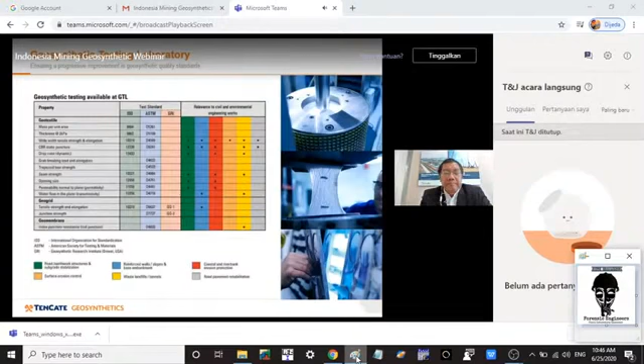The next slide shows the certificate from GTL as a geosynthetic testing laboratory, and also the certificate from the Department of Standards Malaysia. In Indonesia, our offices are split over three parts of Indonesia, from west to east, to cover all territory. In the west, we have a branch office in Pekanbaru, mainly to support Sumatra and western Indonesia. The center is covered from Jakarta, our main office in Indonesia. In the east, we have a branch office in Makassar.

So basically in Indonesia, we are able to support product technical sales, and we are also able to support design engineering. Mr. Hadi is our design engineer in Indonesia, now the host. For commercial matters, we collaborate with selected partners and distributors.

Okay, now we are going to the brands of TenCate and details of the products. The first brand is TenCate Polyfelt. This is a very popular brand, especially in Indonesia, the Asia market, and Europe, because this brand originally came from Austria. It encompasses a wide range of non-woven and composites combined with non-woven elements for various infrastructure markets. In Asia, we produce TenCate Polyfelt non-woven and composites in our production facility in Malaysia.

If you look at the detail for embankment and slope - high embankments under heavy load from mine infrastructure, and low embankments over soft soil, are very common mining challenges. As you can see from the picture, the geosynthetic is placed at the bottom of the embankment, functioning as basal reinforcement. Mirafi PET is a very good material for this application, and our product can now meet up to 2000 kilonewtons.

The next application is for slopes. Reinforced soil slopes create access roads or working platforms, and can utilize site-won materials as both fill and backfill material. As you can see from the picture, the geosynthetic is placed layer by layer as slope reinforcement. Our products for this application are geogrid and also PEC composite, good for fine backfill material, as well as Mirafi PET which has a range up to very high tensile strength. For erosion control, we use, among others, Polymat geomat.

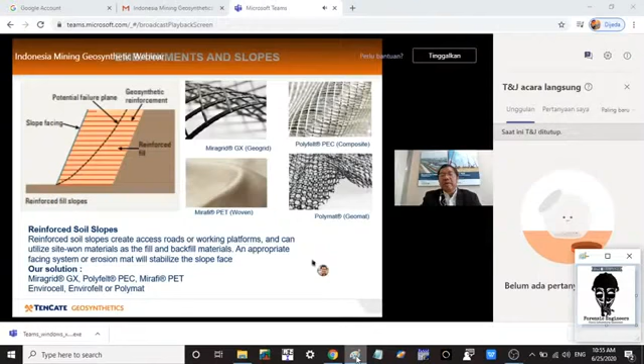The next application is for dam walls and retaining structures. This is a very common application in mining. Our products that meet this application are geogrid and also the polyfelt PEC composite.

Now we move to the next application, haul roads. This is a main application because mining sites have long roads for hauling. The function of this geosynthetic has the following benefits: cost saving and lower environmental impact; separation, so there's no mixing between the granular road construction material and the subgrade; and improving a stronger platform over time due to the reinforcement.

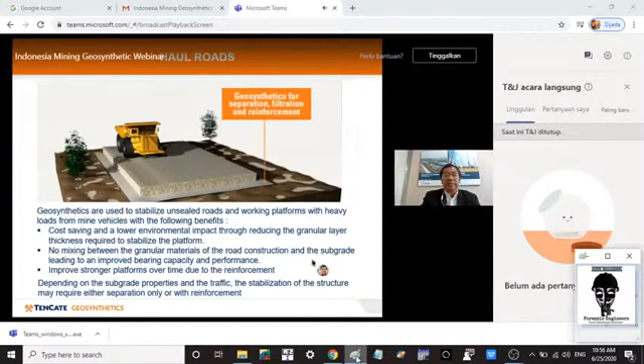The choice depends on the subgrade condition and the traffic load. The lightest option is to use only separation, for which we have the product Polyfelt TS. Its function is as a separator to prevent the upper granular layer from penetrating the subgrade beneath.

As you can see in the picture, by using the geosynthetic we can reduce the fill layer embankment thickness. This results in cost savings when we use the Polyfelt TS non-woven.

If the ground is very soft and the traffic is very high or heavy, separation alone is not enough, and we need another geosynthetic that can function as both separation and reinforcement. You can see the comparison between using no geosynthetic, using separator only, using geogrid, and using the new product developed by Tencate under the brand Mirafi SP geotextile.

As you can see, with Mirafi SP the embankment can be minimized. This provides cost savings for miners and is a very good material.

I'll show the comparison on the four main functions of this product, the Mirafi SP, starting with its reinforcement performance. We can see from the picture the comparison between SP and geogrid.

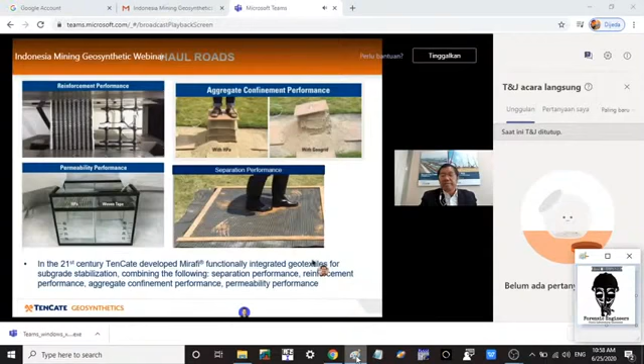Next is the port application, for hydraulic applications, where we have products under the Mirafi FM series. The port is a very main part of the mining supply chain, used to deliver material from the mine to other areas.

As you can see in the picture, the Mirafi FM concrete matrix can be used as basal reinforcement, the Polyfelt PS is used for filtration under riprap, and Geotube can be used for a core or breakwater, and also for dunes.

For railway, even though we rarely encounter this, the next infrastructure for mining, railway, should be a very main part of delivering mine product to the port.

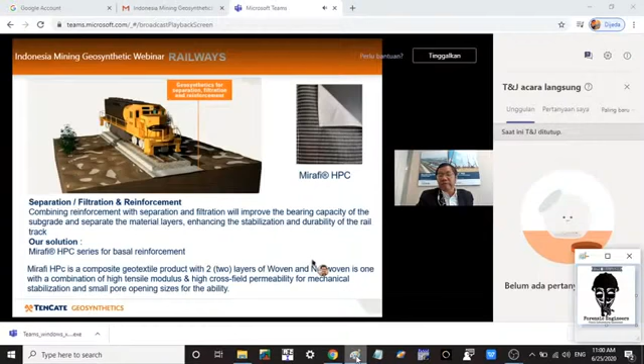The product we have is Mirafi HPC, a composite geotextile product with two layers of woven and non-woven material, combining high tensile modulus and high cross-field permeability for mechanical stabilization, with small pore opening size for filtration ability. For more product details, interested participants can contact our office.

This is specialized for railway applications. The next one is lining and water management, which I will pass on, as the next presenter will explain tailing and water management.

Included applications are using GCL for the lining of ponds, and also non-woven material as protection against the lining system, such as for geomembrane.

The next presenter will talk in detail about tailing and water management using geotube dewatering, and also mine processing. Please keep following this webinar, as the next presenter will cover these three applications, including closure and rehabilitation. I will pass this one along.

Finally, I'm going to the last part of the presentation. I'll show some selected project references, especially in Indonesia, from work already completed. The first is the application of non-woven composite reinforcement for separation on mine roads. As I mentioned earlier, the haul road is a very good application for this material.

This project is for coal mining in South Kalimantan, already about 10 years ago. Then the next project...

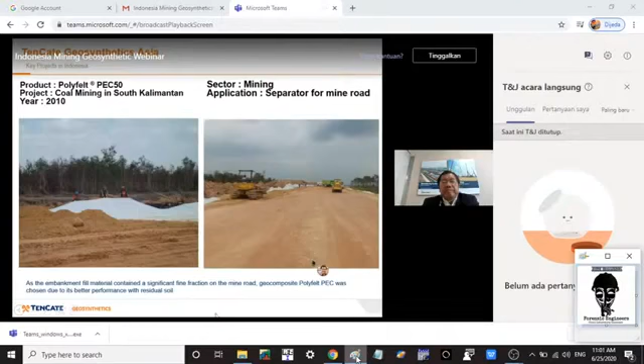The next one is the application of steel PET woven material, used for... Okay sorry, one slide before that: application of geogrid GX200/50. This is for a reinforced structure in a gold mine in East Indonesia.

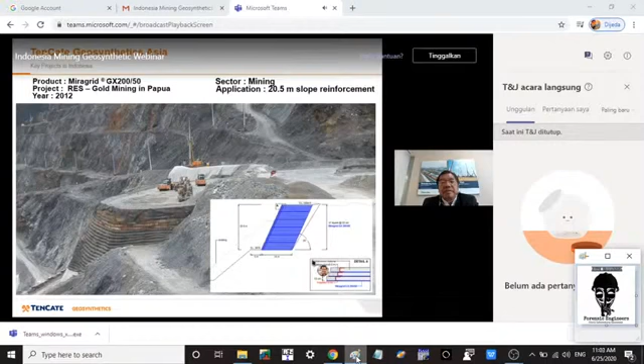As you can see here, the slope height is 20.5 meters, and the geogrid was installed layer by layer.

To show you the rough drawing, it's installed layer by layer using PET 200. I'd like to inform all participants that TenCate provides technical support. We can give a proposal that includes the detail of how the material will be installed during execution.

Another interesting application is for a dump site for coal gradation, mechanical screening at PT KPC in East Kalimantan. This was a long time ago, but it's a very good application of PEC because the fill material contained a significant fine fraction, so PEC as reinforcement was chosen due to its better performance with residual soil. So PEC is a very good product for fill embankments with fine residual soil.

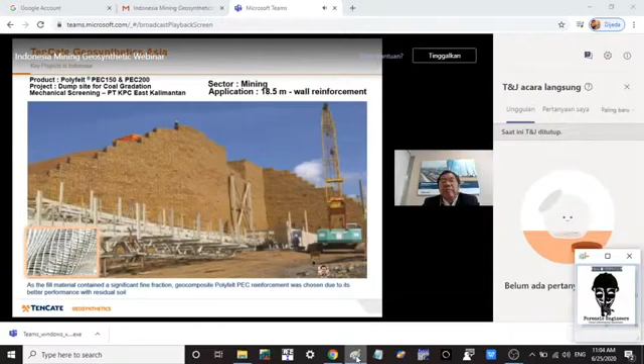This application is for a wall, with height up to 18.5 meters. You can see the drawing, two types of PEC installed: on the bottom, PEC 200, meaning 200 kilonewton, and at the top of the wall, we use PEC 150 kilonewton.

The next one is still slope reinforcement, for the dump side for slag at PT Inco Nickel Sulawesi. This was already more than 10 years ago. We can see here that PEC 100 and PEC 150 were installed layer by layer, showing how the installation was done on site.

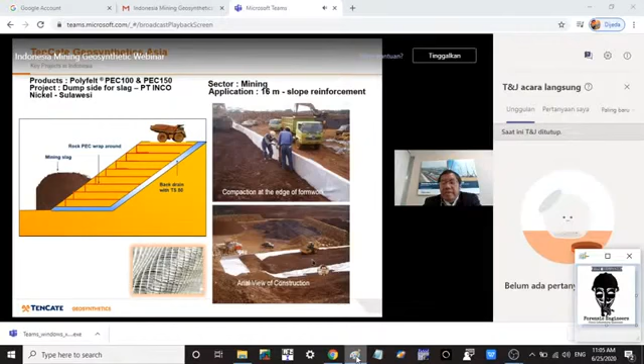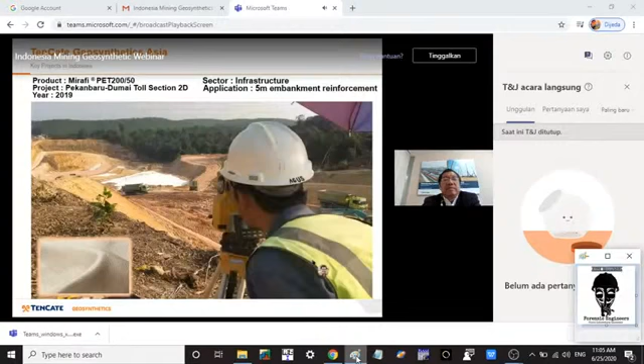Now to share the application of prefabricated vertical drain, this is for infrastructure for the Trans Sumatra project. The Sumatra highway is now under intensive work to be finished this year or next year for some sections. So we installed PVD, and also PET for embankment reinforcement.

The last application in Indonesia is for lining. We use a geosynthetic liner, made from natrium or sodium bentonite, to be the impermeable liner for lining applications.

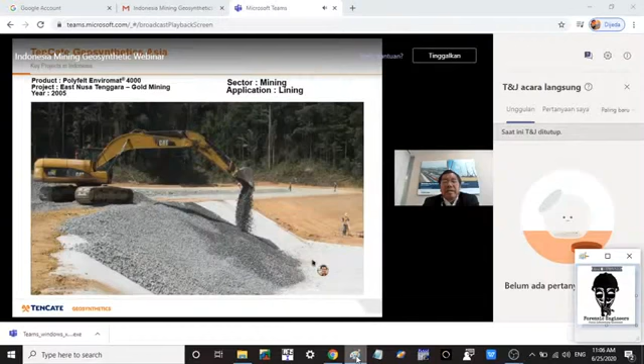The last project, the geotube geodewatering project in South Kalimantan, I'll pass on since the next presenter will talk more in detail about this.

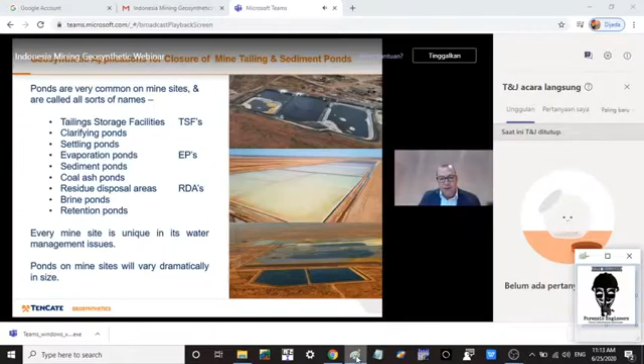So if we look at a water or liquid containment pond on a mine site, geosynthetics can be used in 3 different applications. The first is when you're actually building the pond. You may use geosynthetics if you're lining it, so things like geomembranes or GCLs, as well as other materials. And then when the pond is in use, you may want to be dewatering it, removing the sediment or sludge from the water. So you can use geotube dewatering, and occasionally, if you're more towards the end of life, you might be looking to dewater it using PVDs perhaps.

And at the end of the useful life of the pond, you may wish to come back and cap it, and that's where we'll be talking today. And there's two solutions that are used in capping of a pond. You can either cap it with a lining solution, such as a geomembrane or GCL, and that's pretty much done to make sure the rainwater coming in does not get into the sludge underneath, or alternatively you don't let the contaminants below come up. Or you may be looking to reinforce the top of the pond, which will be the focus of what we talk about today. And essentially what you're doing there is putting soil on top of a very, very soft sludge.

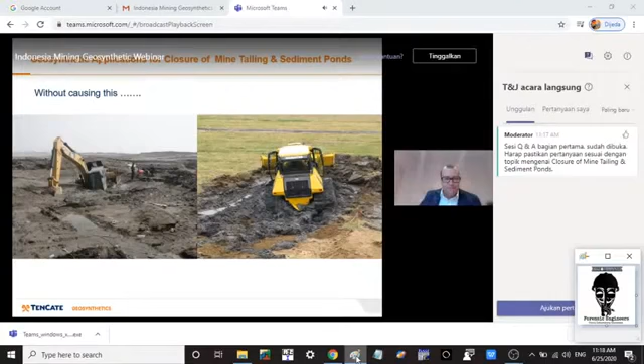So they could have just filled that up with sediment and then built on top, they could have dewatered it out, or they could have capped it. But at the end, their intent was to get a layer of soil on top so they can revegetate it. So that's the situation we're talking about.

So if we've got a pond with very soft sludge, we need to be able to get construction access out there to place the reinforcement solution as well as place the soil layer. That's why the reinforcement layer is there. It needs to separate the sludge below from the material on top. It needs to allow water flow, and it needs to have good tensile strength. And the strength of the material we'll select during the design phase.

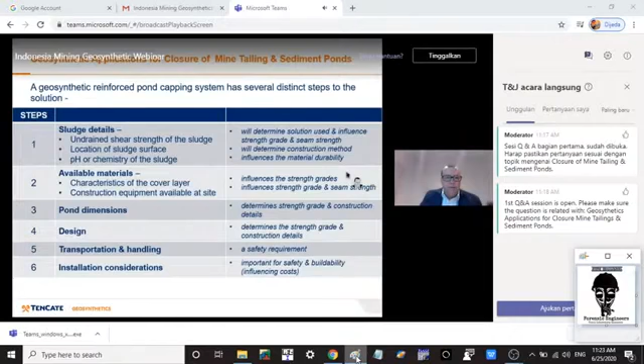So if we start with looking at the sludge, you can look at the pond and you can try and determine if your crust is stiff or soft, but the best way to do it, or the only way really to do it, is to actually determine the undrained shear strength. It's one thing to look at it, it's another thing to know what's going on beneath the surface, as well as how consistent the undrained shear strength is across the pond as well.

So if the actual geotech report comes back and says you've got some reasonably good strength for that crust as well as beneath it, then the simplest and cheapest method is just to build on top of it. Option 2 is where it's kind of middle of the range, and you may have solutions where you can stiffen it a little bit. So you may dewater the sludge, or alternatively, if you're confident, you may want to have the geotech people look at placing thin layers of dry tailings and building it up. But you'd want to know for sure what's going on beneath the surface.

But there are many instances where that sludge is actually either soft on the surface or soft beneath the surface, and you need to reinforce it. And that may be in instances where you've actually filled that pond quickly and it hasn't allowed the material below to evaporate out. It might be in high rainfall areas, or it might just be the poor consolidation properties of the sludge itself. But option 3 is where we're looking today.

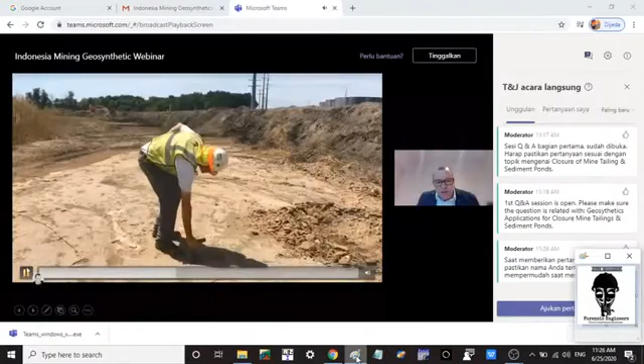You can see as he punches through the crust how soft it is underneath, and with hindsight perhaps he should have been wearing a safety harness or similar. But you can see the point there that whilst that crust looks stiff, in actual fact underneath it's pretty weak.

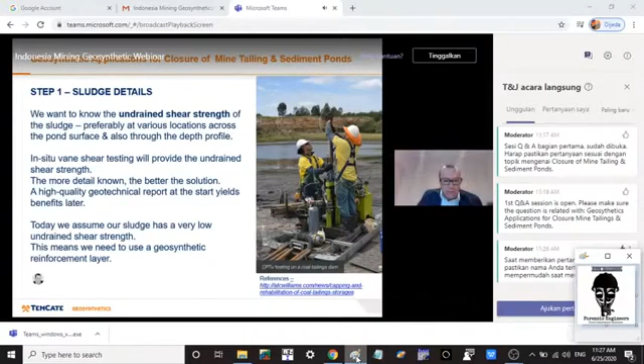I think it's all well and good to have one result, but you'd want to know across the width and down the depth at a number of locations exactly what we're dealing with, because that'll yield what we're building on. So today we'll just assume we've got a very low undrained shear strength, therefore we need to use a reinforcement layer.

Another detail we should determine with the sludge is the pH, and this is more just a check for short-term durability. So with a mining pond closure, you might be dealing with environmental regulations that'll start talking in hundreds or thousands of years, but the geosynthetic reinforcement is not required for that long.

So the geosynthetic reinforcement is there for the initial years in terms of durability, and is there mainly to take up the load during the construction phase, because over the longer term, the actual cover layer will help put downward pressure and push the water out of the sludge below, and it'll stiffen it up a little bit.

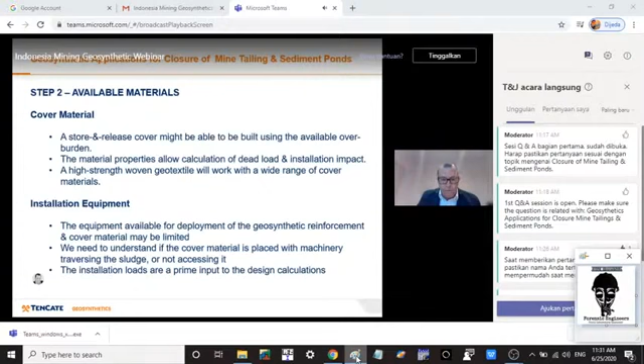So for the point of today, let's just assume that we have a 300 mil drainage layer, and then we put a 1 metre thick capping on top, and we're making that capping layer from the available overburden or mine waste, and we know what construction machinery we've got as well. So this will give us the inputs into the design phase.

Next, we've got to understand the pond dimensions and how they relate to the geotextile panel sizes, a little bit in the buildability phase. So we'll assume a pond of 100 metres by 300. It's not very big. Some dams, as I said before, can be 200,000 or 300,000 square metres or bigger.

We can supply high strength woven geotextile reinforcement in panels from the factory. The benefit of this is the seam strengths achieved in factory made panels are higher than on site, and seam strengths may play an important role later on, which we'll talk about during the construction phase.

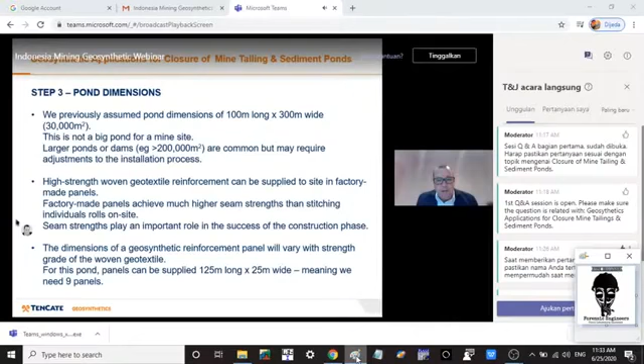So for this pond, we are able to make rolls of 125 metres length, so longer than the 100 metre length, and panels of 25 metres wide. So that's 5 rolls stitched together. So in this case here, we would need 9 panels. Now the 9th panel may not be 25 metres wide, but you can see the logic: take the pond dimensions and start to figure out how many panels you need.

So now we step into design. We've got our knowledge around the sludge. We've got our knowledge around the loads, as in the machinery loads and the construction and the cover material loads, and we understand the dimensions of the pond and the panel layout.

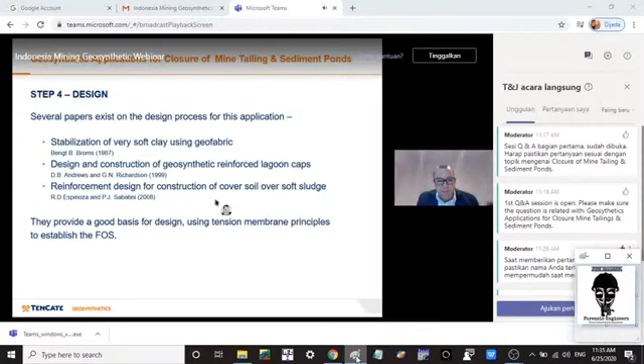So in terms of design, I'm not going to step through it. What I will point out is there's 3 very good papers. They all build on each other, from 87, 99, 2008, and the 2008 paper actually gives a worked example as well. These papers provide a good basis for design, and they can also support your own design methods with your own software, or proprietary software.

Now, if the sludge is very weak, as the cover material is placed, you're going to get stresses along the seams. So the seam strength needs to be understood. I mentioned before that factory seam strengths can get a higher result than in situ seaming. This is where you need to apply judgment. For example, with in situ seaming, you can do trials, and you might be getting 30, 35%, maybe 40% of the strength across the seam, depending on the capability of the stitcher. In the factory, depending on the capability of the teams, you can get north of 50%.

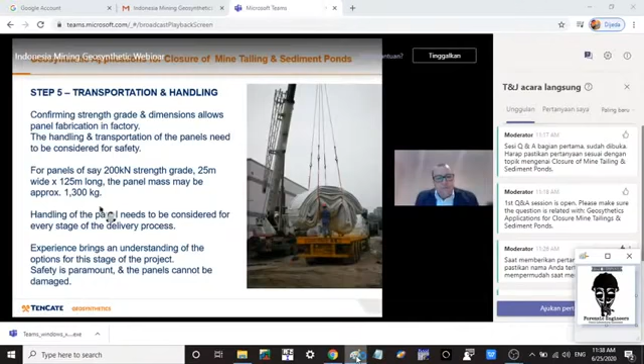The last step is where all the construction tips and tricks come into play. We'll talk about installation, and then I'll show some photos and a couple of case studies. Spending time thinking through how to construct it and getting it right in the planning process will make life a lot easier when you actually build it, because it's hard when all the panels are on site and you're trying to pull it across and it's not quite working. So this is a bit of a summary slide.

This is a plan view. The panels will be delivered to site and need to be unfolded, but essentially what you've got here is the pond walls and the saturated sludge. You're then rolling the panels out, with overlap at the edge. As you roll it out, you'll probably want to ballast the edge to resist uplift. You then take the next panel out and overlap the panels - in this case I've mentioned 1 meter, but that's just a number.

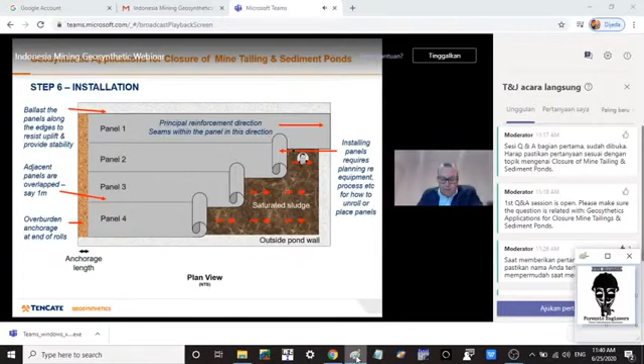Having got it in and anchored the ends - remember we had a 300mm sand layer - we start to place the sand layer over the geotextile, working perpendicular to the principal strength direction, which is left to right. After placing the sand layer, we introduce the tensioning finger berms. These start to tension the geotextile in the principal reinforcement direction, and by working this way you slowly put it in tension so you're not overstressing it.

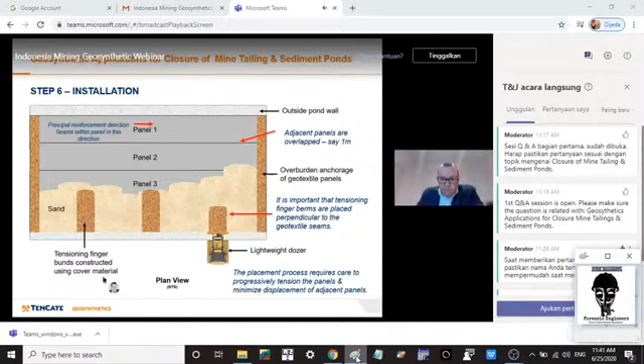So you need to move carefully - you can see the lightweight dozer there, but we've done that design knowing what equipment we're working with. Having put the berms in place, we can then fill in between - in essence, filling in the palm between the fingers. You progressively keep going forward with your sand and your finger berms and then filling, all the time working perpendicular.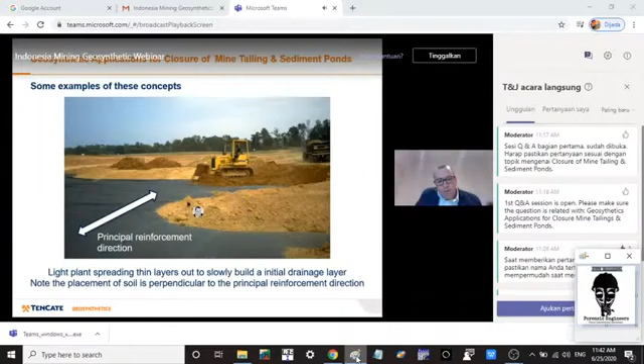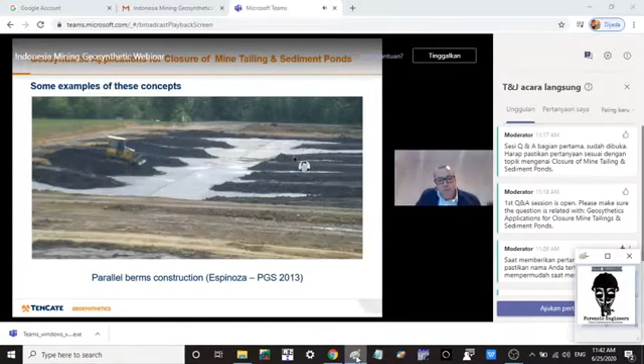Here's an example of the soil layer being laid on top. You see a little bit of a mud wave there, working perpendicular to the principal reinforcement direction. But you may have instances where you don't have a soil layer - you may just want to go straight into the tensioning berms. In this case it looks quite small, and you can see the seams running up from top to bottom, coming across from either side. That's quite a valid way of approaching it as well.

The point of this photo is to show that sometimes the mud wave can be quite significant, and if you're putting load on and the sludge beneath is moving that much, you've got to ensure that your material stays together. So those seam strengths are important and need to be considered so you're not having gaps open up within the reinforcement layer.

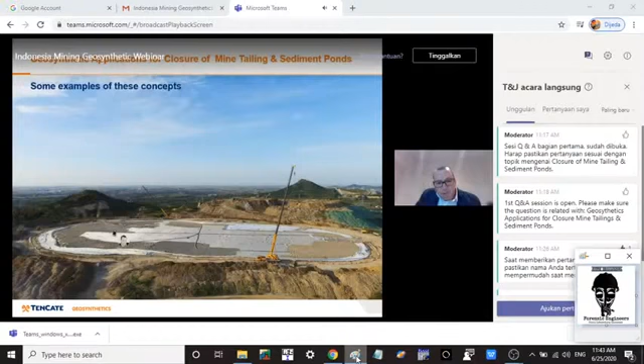An aerial shot of a project in China where all the panels are laid out. You can see some ballasting probably for uplift, buried in around the edges for anchoring trenches, and then progressively moving out with the material so you're progressively tensioning, putting the reinforcement into action. In this case they're working from the side, but there's also some equipment moving slowly out, pushing the materials around.

So I've got 3 case studies to show examples of what we've just talked about in action. This is one in the US where you think you've got a good crust, and you open up beneath and it's just sludge. In this instance you can see the equipment coming in.

You've got rolls of woven geotextile - in this case it looks like it's only 2 rolls wide, with one seam down the middle getting pulled out. There's the seam there. They're pulling it in a certain way such that the material doesn't rip or tear, just pulling it out progressively and placing it down.

Again, you can see the seam, and then you know that you get that separation, you get strength, and you also get the water or liquid coming through as well. So you get that release of pore water pressure.

And the point I made before about the use of cover materials, wovens and geotextiles can be quite accepting of a broad range of materials. If you look here, that's quite big rock being used, which will have a bit of impact on the geotextile as it's placed, and you're not going to get that with many other geosynthetic solutions.

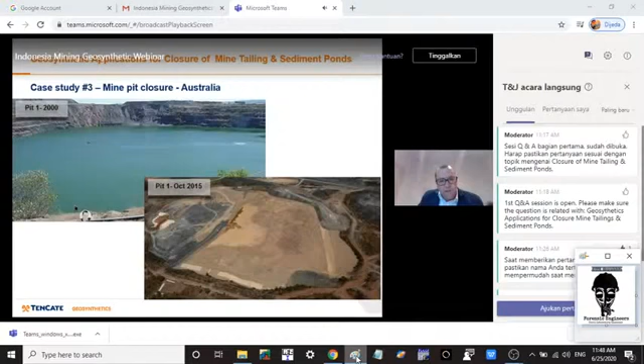So the stitching was done on site rather than in factory, but the photos will show why - it's quite a big area. That was it in 2000, obviously a little liquid. This is what it looks like 15 years later.

The first stage was putting the PVDs in, a little bit tricky. They had a barge with a big mast, punching the PVDs down. You can see that in this case the water level was above the sludge.

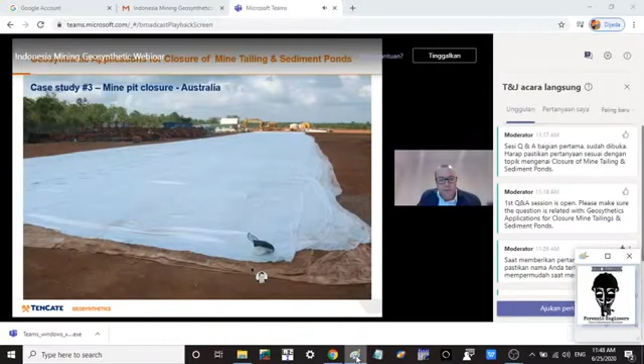The high-strength woven that was delivered to site was sewn on site to provide the seams, and then progressively laid out. You can see that whilst it had now provided a bit of a crust compared to the water before, the machinery and rock layer would have gone and punched through that crust.

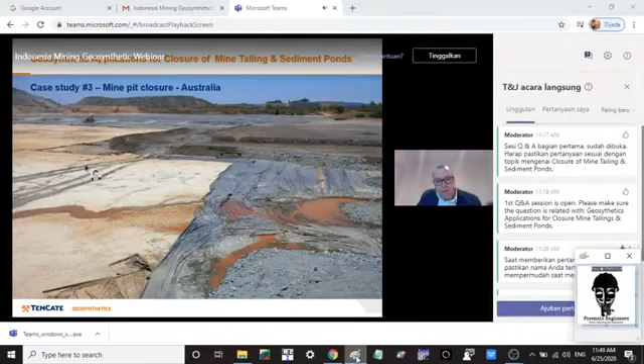So they're putting the reinforcement layer down and slowly working their way across. You can see here the reinforcement layer, just building across, in a closer photo. They had multiple layers of geosynthetics - the black layer here is just a cheap slip film woven on top of the PT 150 kilonewton biaxial reinforcement layer.

And this is probably the photo that shows it best, where they've actually got the reinforcement layer being installed and putting the finger berms in, then filling in between, slowly working their way in from around the edge. And that's what it looks like today.

So that's the end of my talk. Hopefully you learned a little bit around reinforcement of a pond closure capping. And I'll hand back to you, Hardy, and thank everyone for their attention.

Thank you, Brendan, for your nice presentation.

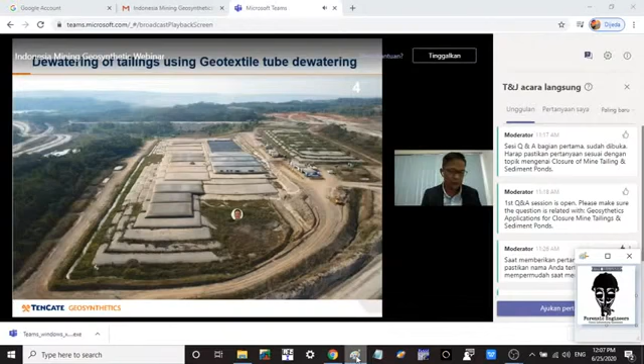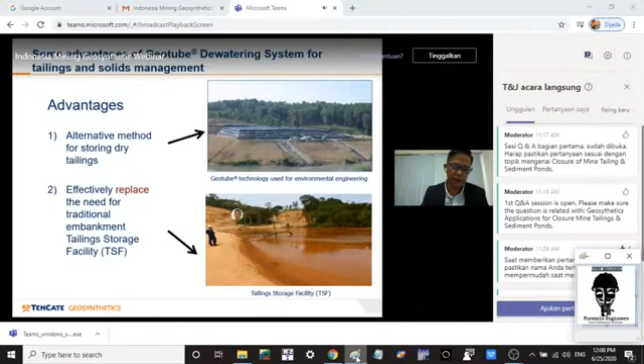So some of the advantages of geotube dewatering systems: one is an alternative method for storing dry tailings, and it can effectively replace the need for tailing storage facilities. There are lots of advantages, listed number 1 to number 7. You can reduce tailing pond overloads. It can also be used for pond or lagoon maintenance, cleaning of sludge ponds, cleaning storm water runoff, and in some projects I have done in the past, especially in gold mines, to recover precious ore for later processing.

So if you look at the geotube dewatering process, it's really simple. The sludge source might come from the settling pond or evaporation pond, or from the spigots that directly discharge to the TSF. Then as we transfer this sludge into the geotube, in between, it might be injected with polymer.

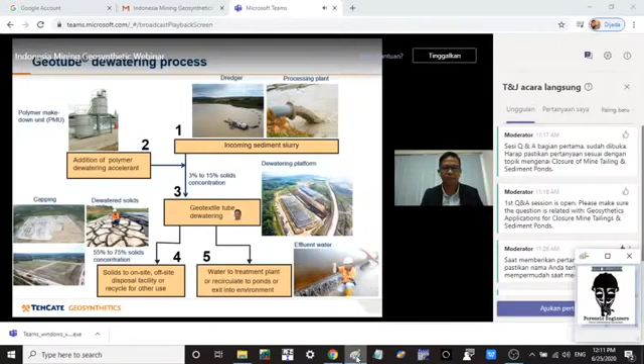So mine waste usually starts within the mine sites, in tailing ponds, heap piles, or mine tunnels underground. There are a few issues: except for the waste rock, it is generally unsuitable for use as structural fill, usually highly saturated or hazardous, and often not allowed to be discharged untreated to the environment.

And then they have a few conventional methods for the water discharged from the tailing pond to the river or the lakes; some of them use settling ponds. Some use mechanical dewatering equipment. And then we have another one, what we call the overburden area.

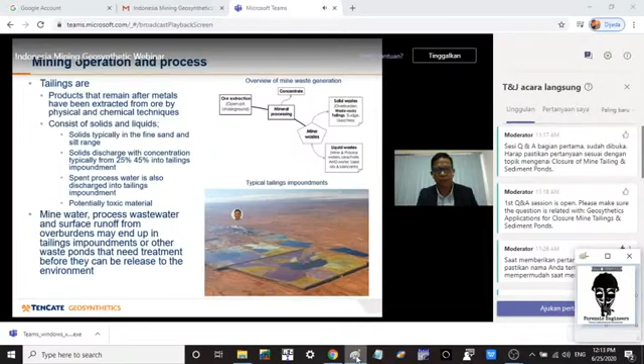So what is a tailing? Tailings are the products that remain after metals have been extracted from ore by physical and chemical techniques. It consists of solids and liquids, with solids typically in the fine sand and silt range. Solids are discharged with concentrations typically from 25% to 45% solids by weight into tailing impoundments. Spent process water runoff is also normally discharged into tailing impoundments, and is also potentially toxic material.

Some typical characteristics of mine tailings for metalliferous ore: the mine ore is usually ground to rock flour, while coal is crushed for processing, thereby generating fines. Tailings are produced in aqueous slurry form with a very low solid concentration, and tailing particles tend to be angular in shape except for fly ash.

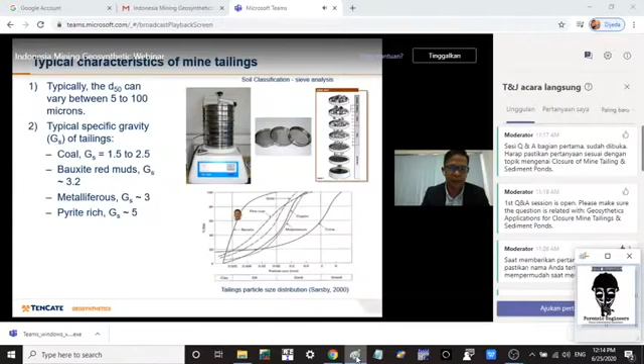So these are a few examples of conventional dewatering methods that have been used by some mining companies. They use chamber filter presses. Some use belt presses or centrifuges. Mechanical dewatering normally requires high capex. They're difficult to move around. They have a lot of frequent wear and tear and breakdowns. Then the wet cake also still needs to be handled, transported and disposed of.

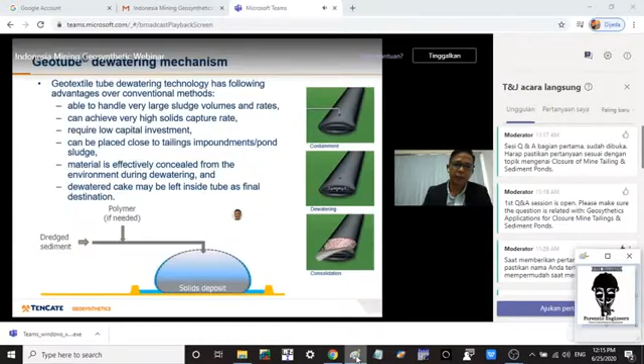If you look into the geotube dewatering mechanism, it's really quite straightforward: if you have a sludge, you just transfer the solids into the bags, the water comes out and the solids will be retained in the bags. So one of the good things about geotube dewatering is we are able to handle very large sludge volumes and rates.

So how long and how frequent the geotube dewatering cycle needs to be also depends on how much solid concentration has been transferred into the bags, and we need to allow time for consolidation. So it probably takes about 4 to 5 weeks, especially for mining, to achieve around 45 or 55% final solid concentration.

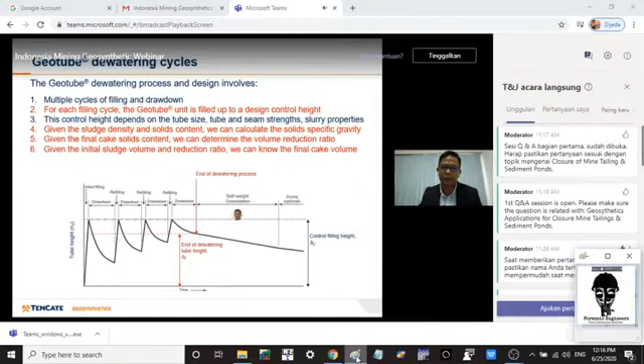I will just talk very briefly on the geotube designs. If you need more information on how we do the design, just email me. I will answer all your questions.

So when we consider the geotube design, there are 3 factors that determine the cost in dollars per cubic meter of dry cake. Number 1 is geotextile tube cost. We can convert it to dollars per cubic meter of dry cake, which I will show you on the next slide. On the polymer cost, it's about dollars per kilogram per metric ton of dry solids. How many kilos for one particular project? Let's say we have 500,000 cubic meters, or we have 1 million cubic meters. How much polymer do we require?

And also the operating expenses. These operating expenses include the pipes, the dewatering platform preparation, manifold, flexible hose; that is under operating cost. If you add up geotube cost, plus polymer cost, and then add this operating cost, we can estimate the total project cost in dollars per cubic meter of dry cake. Is it too high? Is it feasible? Is it viable? So this is one of the good benchmarks to determine whether you want to have a geotube dewatering system in place.

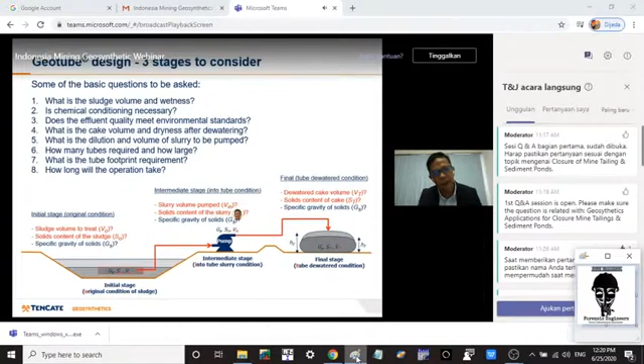So once we know how big the volume is, the scale of the project, then we can do the sizing of the pump, especially the dredger. How big is the dredger? Are we going to pump 500 cubic meters? Are we going to pump 1,000 cubic meters per hour? And then the third stage, once we have the in situ sludge, we know how much solid has been transferred. We can determine the final dewatering cake volume. So these are the three minimum inputs that we need when we start to design the geotube.

So once we know the infill material relative density that we're going to use, and the SG of the solids we're going to work with, we can predetermine the safe maximum fill height. And then we can also predict how many dewatering cycles we need. And then using some tricks with mass volume analysis or equations, we are able to know whatever we pump in, and we can also determine whatever we pump out, including the effluent. As you know, for mining, the effluent water is very critical. So having this geotube dewatering technology, you can also recover a lot of water coming out from the geotube.

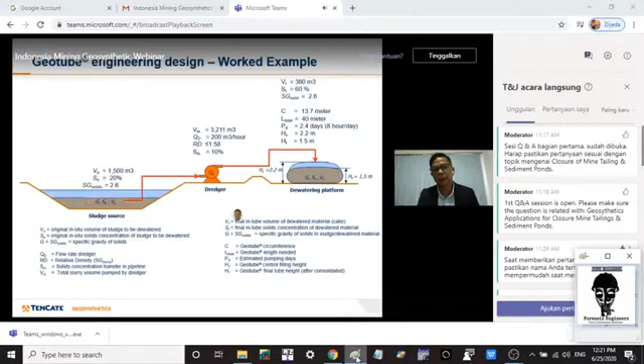So this is a typical worked example. We have all this data. We know how much volume. We know what pumping rates we're going to pump in. And then we can determine how long, how many days and tubes are required for a particular project.

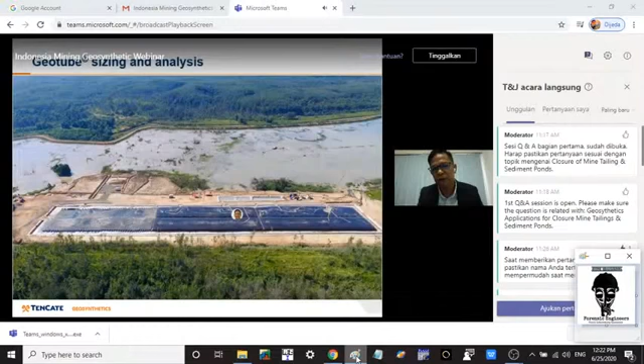This is a very good example. You can have this kind of setup. You can look into this picture. The length of the geotube is about 61.4, and the width is about 36.6 meters.

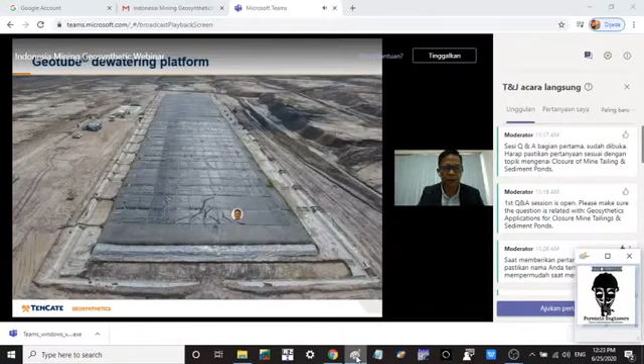So once you start to consider geotube for stacking, we at TenCate always advise the client that they need to engage geotechs to have an SI. So once we go from one layer to the next layer, this is some of our standard procedure. We need to do SPT, or what we call a standard penetration test. We collect some UU data at different soil layers, and probably we go to a minimum of 30 meters.

So once we go for third, fourth layers, we're going to have another test. So we have to check each tube for the moisture content. We also need to check the bulk density, friction angle, in situ pressure, UU pressure. So I will not discuss this in detail. If you have any question on this, just email and let us know.

So you can see in this picture, if you have to compare, there's one guy over there. This is considered the last stack layers that we have done in Indonesia. Yep.

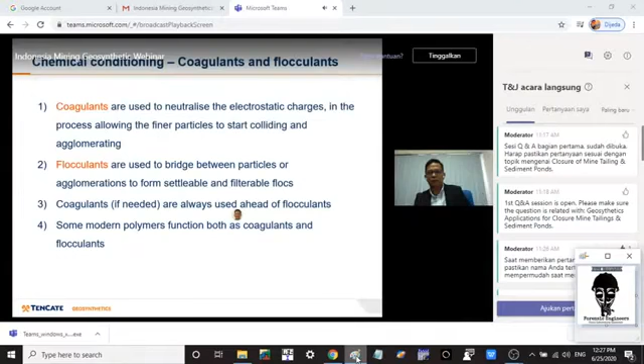So coagulants are used to neutralize the electrostatic charges. Flocculants are used to bridge once they are neutralized. So what's a flocculant? It's going to bridge between the fine particles, and then they become bigger fines, what we call flocs. Coagulant, if needed, is always used ahead of flocculant. So you have to remember this. Coagulant has to be done first, and then you follow with flocculant. But some modern polymers can work as both coagulant and flocculant.

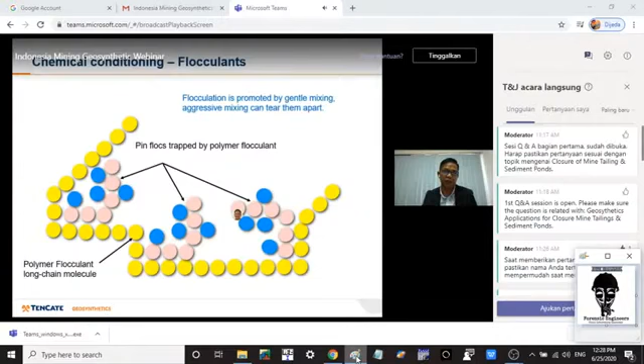So what the flocculant will do, it will supply a long chain molecule around these fine particles, and then it becomes a bigger floc, some call it floc, some call it flower. I don't know why.

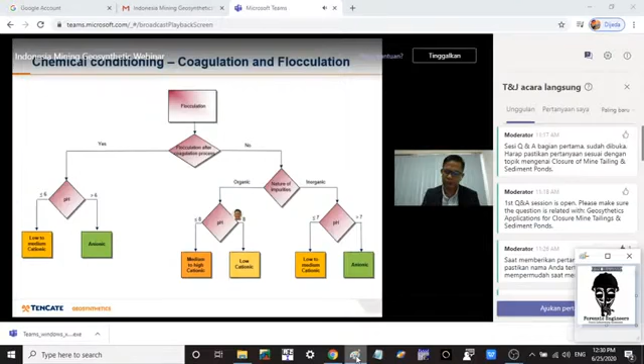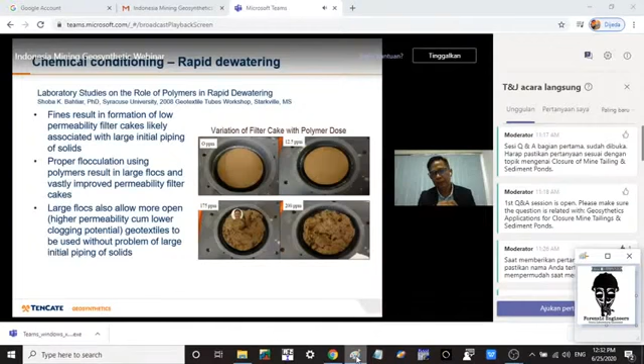So the dewatering test. I will go through quickly on the dewatering test before you start any dewatering project. So lab test and field test. What is the purpose of having a lab and a field test? Once you have done the lab test and field test, at least you can answer some basic questions concerning geotube dewatering: what is the final dewatered solid concentration, and how long does it take to reach that final dewatered solid concentration? What is the solids containment efficiency? How clear is the effluent, and does polymer improve it? What kind of polymer, what kind of coagulant, or what polymer dosage is required?

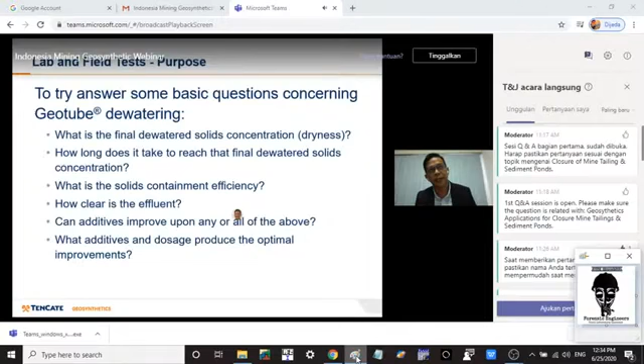So by having a lab test and a field test on site, we can have a general understanding of what kind of sludge we are handling. So TenCate has developed what we call the rapid dewatering test. This is what we call a quick test, yes and no. What type of polymer are we going to use? How much polymer dosage do we require? We also call it the fabric cone test.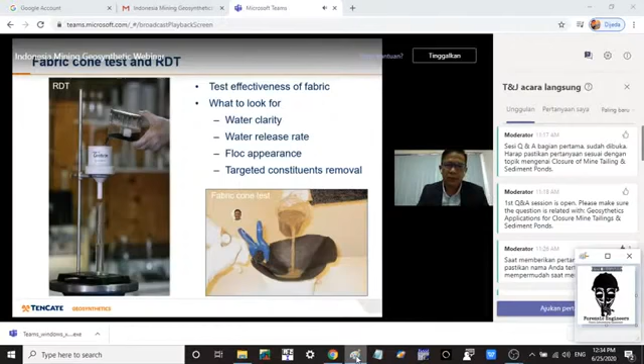So once you have sludge in the lab, we can look at the water clarity. We can also understand the water release rate and the floc: is it a small floc, a strong floc, or a weak floc. So during the fabric cone test or RDT, we can at least understand the sludge characteristics.

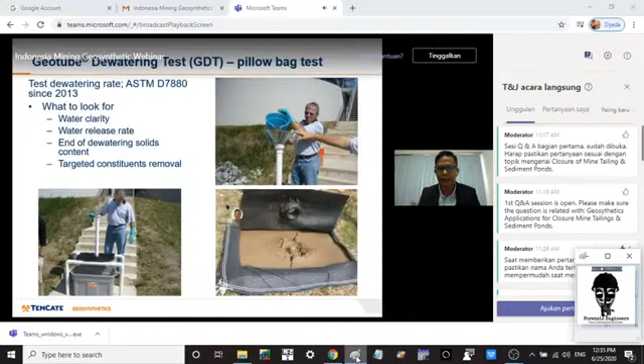So there is a second dewatering test that TenCate has developed. We call it the geotube dewatering test, a small bag test. What we do with this test is, we have a pail of sludge, we mix in the polymer solution and manually stir to make a floc. Once the floc has formed in the pail, we pour it into the bag, and then we see what kind of water clarity, water release rate, and dewatered solid content we get, and we can also predict the final dewatered solids.

So once we are done with the RDT and the GDT, we can go to the next level. We normally have a pilot geotube test. With the pilot geotube test you can understand more. You can see how the tube behaves when you pump at a certain pumping rate. So it is good to have a pilot geotube test. Normally we have a standard pilot test with small bags. We have bags with a circumference of 8.8 and a length of about 30 meters to rent on site.

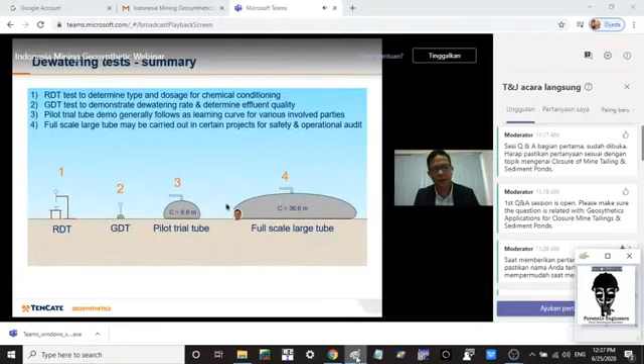So as a summary on the dewatering test, before we go for full scale large tubes up to circumference 36.6, it's good to understand more on sludge characteristics and how it behaves on the geotube by having RDT, GDT, and pilot trial tubes. We can supply material on a pillow bag if any participant wants a trial on site. Just contact the TenCate Jakarta office, and they may deliver some pillow bags for your own testing.

So I will take a few minutes to talk about geotube dewatering application in mining. If you look into this picture, these are some projects we've done in Indonesia.

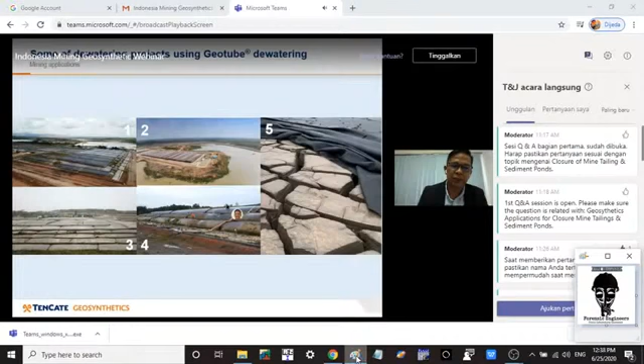The first case study is about coal mines for dewatering of settling ponds located in Indonesia. The challenge of this project: mines required their settling pond to be dewatered, reducing the need for more ponds. As you can see in the picture, the tubes we supplied are over 100 meters long, up to circumference 36.6. So geotube dewatering for this project minimized the footprint and recovered water for use in the mining process.

Here's another project I've done in Malaysia for titanium dioxide plants to contain gypsum. What happened in this project was due to a demand spike, there was an increase in production demand, and the existing filter press could not cope.

So one of the alternatives was having two parallel systems. They have mechanical dewatering still on the filter press, and then they channel about 60% of the sludge coming from the process to the geotubes. This is the solution we gave for this project that required increased wastewater capability. I have written a technical paper on this - if anyone is interested in the details, please let me know.

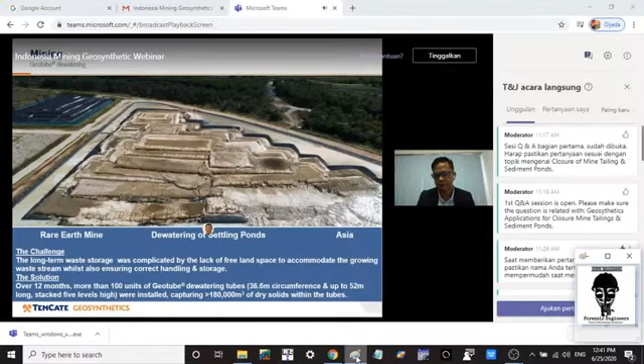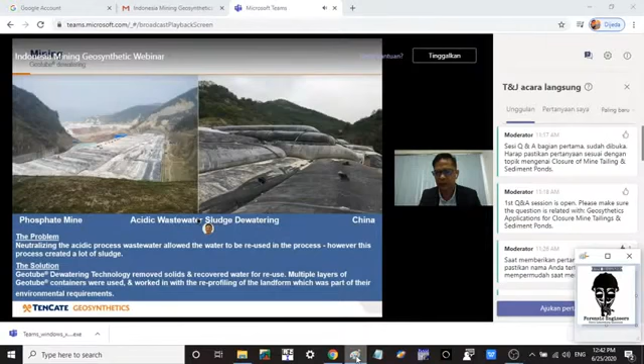This is another project I was involved in, for phosphate mines for acidic wastewater sludge dewatering in China. We also did work with a bauxite mine - I did a trial in Australia. This is very interesting, as in this trial we found success at a bauxite mine without having a polymer. If you look at the quality of the cakes after we cut and open them, we achieved very good final solid concentrations.

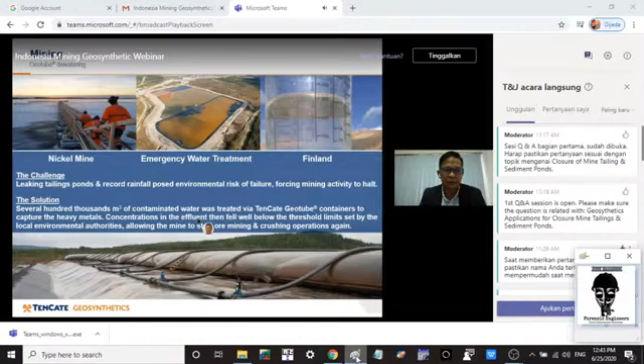And then we have another one from Finland for nickel mines, a big project for an emergency water treatment plant. We have a similar project for coal mines in the United States. For copper mines, normally they have small sediments for stormwater retention basin remediation in the United States. And then we have a rare earth mines project on acid mine drainage treatments in the USA.

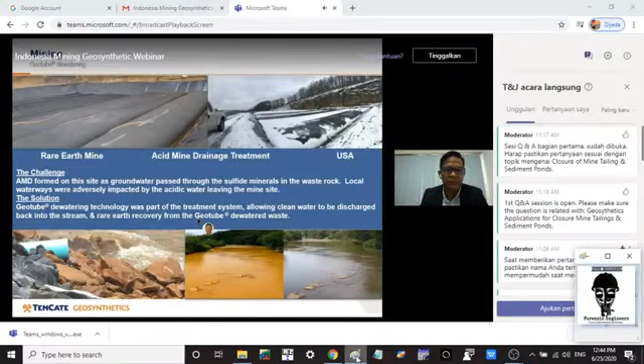For AMD, this is very interesting now. I'm not sure about Asia, but in Europe and in America, they are focusing more on AMD now - acid mine drainage treatments.

We have iron ore mines in Brazil. I also have done an iron ore mine in Malaysia. In these projects, the TSF had breached and the river had filled with tailings, and the river had to be dredged and tailings contained on land with clean water, then returned to the river systems.